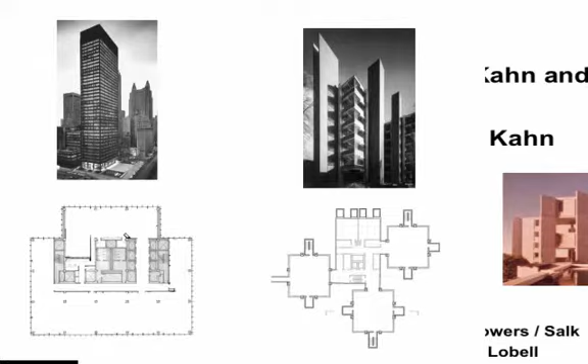So again, here's the building. Does anybody tell me what this is? That's a column. This is stairs, this is ducts - so stairs and ducts, you'd have to know the trick to know which is which. But this is structure, this is mechanical, and he wants to distinguish between them.

So let's start the way we should in architecture with pinning down where our building is located. This is Central City, Philadelphia - Broad Street, Market Street, Penn's 5 Squares, Delaware River, Schuylkill River. So here's that Schuylkill River. University of Pennsylvania is right here in West Philadelphia, so here we are.

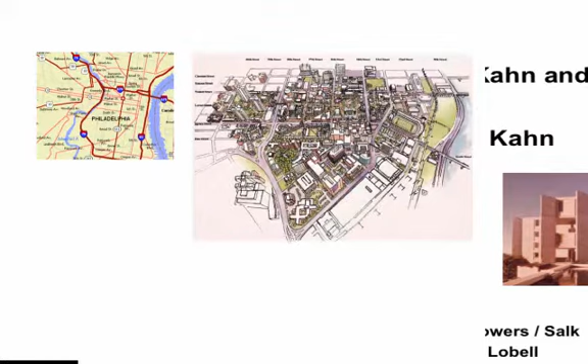Here's an old dormitory. Here is Penn Hospital, the medical school, the biology building, and then here is this laboratory between the medical school and the biology building. This is a walkway between the dorm and these medical buildings. So now we have a sense of context of where it's located.

So here's the pathway between the dorm and medical towers. Here we are in the quad of the dorm, seeing the brick of Kahn's building sticking up and responding to the brick of the dorm. There's a rule at the University of Pennsylvania - all buildings have to have brick.

None of the brick here is structural, it's all veneer, except for these exterior walls here. But this is poured in place concrete with a brick veneer on it, but that's what you had to do. And Kahn's going to respond to this - he didn't like the way that turned out. He's going to respond to it later.

Typical floor, ground floor. Typical floors 2 through 7 are all the same, very similar. On the ground floor, he knocks out one of the pavilions. There's a glass wall around here, but no wall around it at the bottom, and that becomes the entrance. Stairs up and then the doors right here. Same thing over here - he's left out the walls and this becomes an entrance pavilion.

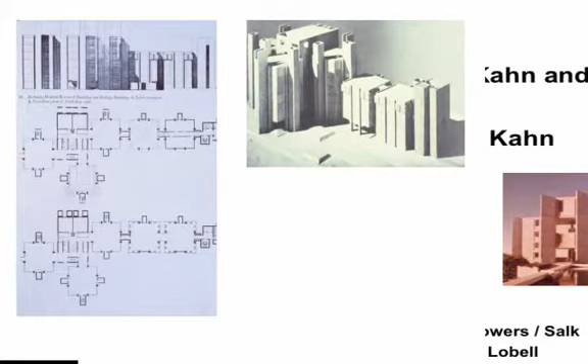I should have gotten a typical floor, but here's a plan of a ground floor. Let's pretend it's a typical floor and see what we have here. We see all this articulation - things, he's telling us this is this, this is this. Let's see what all this is and why it's arranged this way.

And Kahn begins - now we're going to get theoretical, and we'll spend some time on theory. Kahn begins with, what is science? Kahn begins every building with the question, what does this building want to be?

So let's say we're doing a school, and it's almost a cliche - well, school should be a place where it's good to learn. Okay, but now, what is learning?

I'm on a jury, and I'm looking at your school. Is your position that the job of school is to prepare people to become part of their society? Or is the job of the school to enable each individual to identify their own individual sense of who they are and manifest that? Two different theories. I'm not going to say which one is right, but if I'm on your jury, I want to know what your attitude toward education is. That's going to help me understand your school.

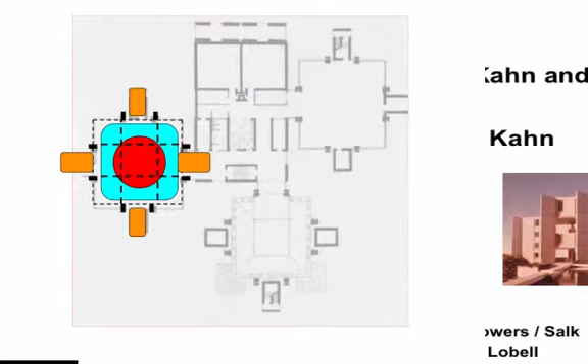Totally through a series of logical steps, not by arbitrarily just putting bumps on the building. Now we've got a couple more things. We need our first means of egress, passenger elevator, freight elevator, toilets, storage rooms, intake, vertical ducts.

Before that, we got three of these. Okay, but they all need to share this stuff. So now we've got these three guys clustered around this. Kahn calls this servant spaces, and these are servant spaces, and these are served spaces. So the served spaces are the main functional spaces of the building. The servant spaces are corridors, stairs, elevators, etc.

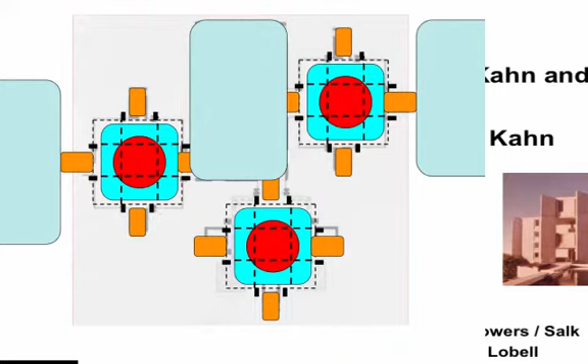Now, we've got to hook up to the biology building that he does next, and hook up to the biology lab that he does next, and hook up to the medical school. So now, here's the whole thing. We've arrived at this through these logical steps.

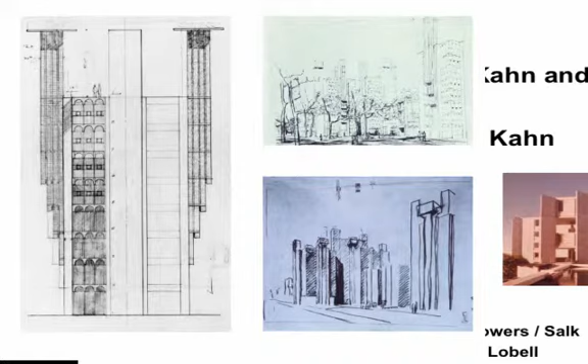As an interesting backdrop, Kahn explored various ideas before arriving at the final form of the building. He had these structures in an arch form, and said, if this lab's exhaust air has to carry for 3 or 4 floors, it's got to be more. This has to carry exhaust air for all 7 floors, so it's got to be even more, and it would get thicker as it went up. He said it's just too much. For a while he said, let's have big exhaust fans on top, with big hoods like you see in industrial buildings. He ended up not doing that. Here's a drawing with this thing stepped out. So there are many earlier versions. If you study this building in detail, you can find the early studies, but it ends up with this. Here's the structure we were looking at.

So here's the structure we were looking at. Now I'm going to throw out some sexy terms: this building is precast, pre-stressed, post-tension. So what does precast mean?

Rather than building forms on the site and pouring the concrete there, you can get higher quality concrete if you pour it in a factory under controlled conditions. You have vibrating beds to make it very dense, stuff like that.

Pre-stressed means what? There are rebars in the concrete. In pre-stressed, which you can't do very well on site, it's done in a factory. You tension the rebars, then pour the concrete. Once it sets, you let go. If you tension the lower rebars, as they come back it's going to bow the concrete up and give it a head start against the downward pressure.

So if you see a parking garage with big spans, those are probably pre-stressed. And finally, post-tension is rebars you put in tension after you put the building together. We'll see that in a minute.

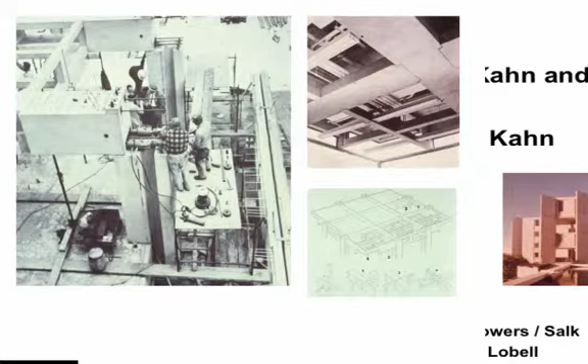Now, here's an entrance. I said he leaves out the glass and brick down here, and this then becomes an entrance pavilion. Now, this is the stairs going in. I'm taking this, well, I didn't take the picture. This picture is taken from the other side, and the reason for that is just the lighting is better so you can see this. So imagine these stairs are here. Every time you go into the building, you come up these stairs and you look up, and the whole story that I just told you, you see.

So Kahn liked to say, the man is a record of the making of the man. The building is a record of the making of the building. So this building is telling us how it's put together, the story I just told you. Now, obviously, a lot of people who are not architects are not going to comprehend all this. But Kahn feels that on a subconscious level, it'll be clear to you what's going on. And this is what architecture should do. It should have a clarity.

And when we talk about Kahn's philosophy, there's a reason for this. In other words, it is communicating a deep principle about who and what we are, an architect's role in that. Now, while we're at it, you'll notice when we look here, this is a Vierendeel. It's not a solid beam, but a Vierendeel. You can tell me what a Vierendeel is.

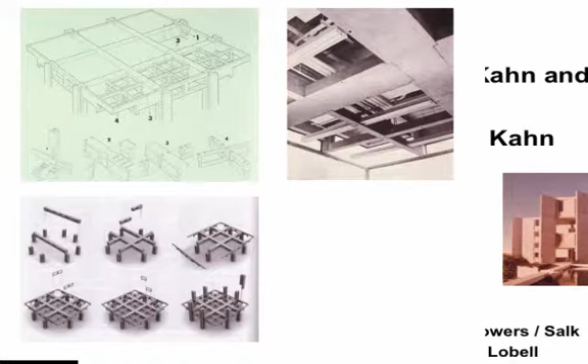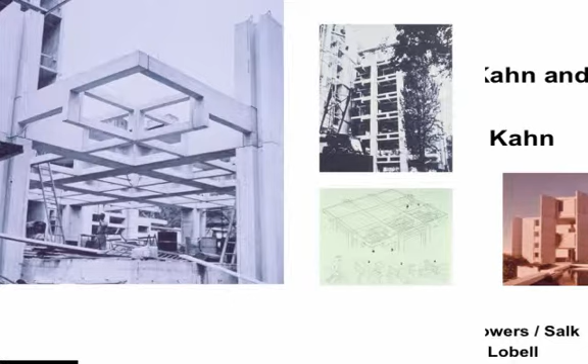So we can see that space where the mechanical runs. See all these holes here, here, here. All the pipes and ducts can run through there. So we see these holes here. Pipes and ducts can run through there. There aren't any in the entrance, but there are up there.

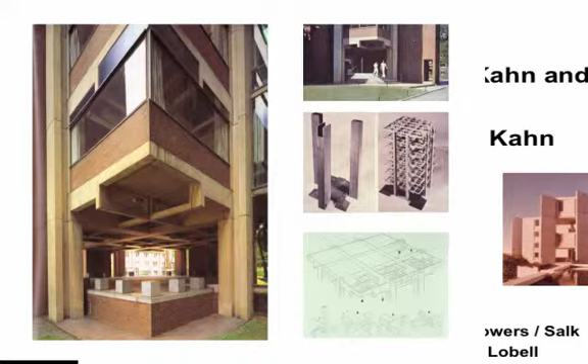Mechanical is important in any building. In a laboratory, mechanical is heating, ventilating, air conditioning, plumbing. It's the air ducts, the compressors for the air conditioning, the fans for moving the air around, the electrical wires, the plumbing. HVAC or mechanical in a laboratory is half the budget, half the square footage, and half the cubic footage. In other words, it's hugely important.

So we saw Mies in the Seagram building hiding all that in the center. And there are reasons for that. You don't want the mechanical out where the light is, where the windows are. You want the people out there. Put the elevator in the center.

But Kahn is very engaged with this mechanical, and he's thinking, this is half the building. I don't want to hide it. It is as important to express the mechanical as it is to express the structure. And so the building told us how the structure worked. Now it's going to tell us how it breathes.

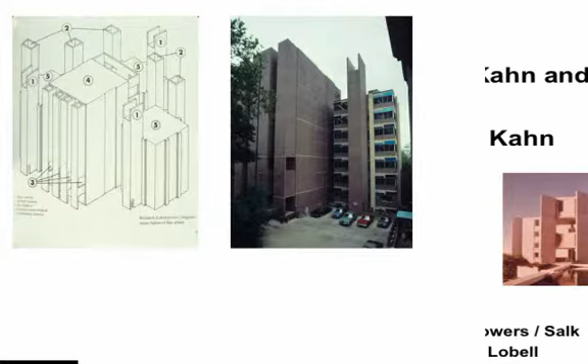So in, up, down, across, and out. The building is a diagram of its breathing. Again, if this is solid, it's air ducts. If it's got these fins, it's stairs. This diagram doesn't show the towers on the back, but air comes up the towers in the back into this big mechanical room, then comes out, goes down here, and into each laboratory, and is then exhausted out and up through here.

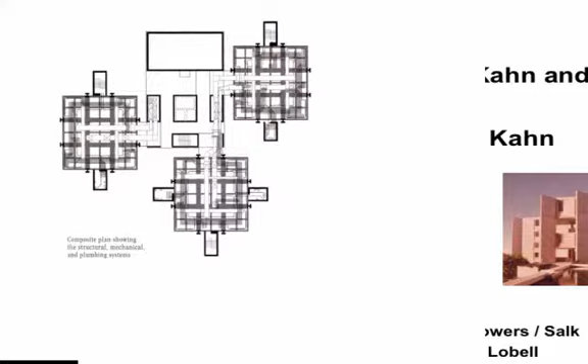So this is a diagram of how the building's made and how it works, and expressive of Kahn's philosophy of science.

Now, I just told you a wonderful story. And this is one of the most important and most respected buildings of the 20th century. Kahn is a very didactic architect. Who could tell me what didactic means? Teaching. So the building is not only supposed to be a good building, it's supposed to explain to us how architecture should be.

Okay, having said all that, there were some problems with this building. And they're very famous, very well studied, very well understood. A major sociologist did a study of it, but we all knew what the problems were very quickly. So the problems are as follows.

First problem is, scientists look at these three pavilions and say, you know what? I've got half my team in here and half my team in here, and I'm running back and forth trying to coordinate things. Why couldn't these three pavilions have just been one continuous space three times as big?

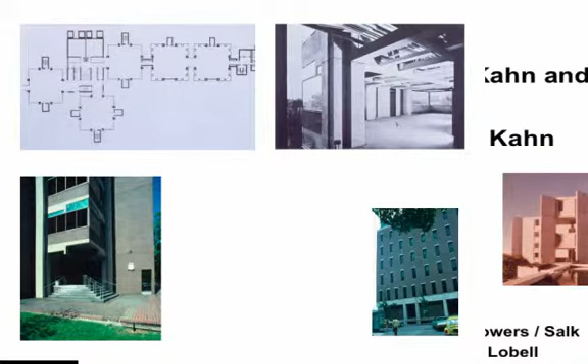So, those are the 3 major criticisms of the medical towers. And we're going to see in Kahn's next building, also a laboratory, the Salk Center, that Kahn addresses those 3 criticisms. So this is Richards Medical Towers.

You get a similar but not deadly virus. You take the original virus, you weaken it, or you kill it. And then you make a vaccine that you inject into children. And the body recognizes, oh my God, that's polio, but it's not going to hurt you. It then mounts a defense of antibodies. Those antibodies remain, so that when the poliovirus does show up, your body deals with it immediately before it causes disease.

So when you're a kid, you get vaccines for measles, mumps, polio, etc. In the 1950s, the March of Dimes, which was the organization dealing with polio—there weren't big government programs in those days—selected a young researcher, Jonas Salk, to develop a vaccine. He did. It was tested in 1954, and it was totally effective. And so immediately, some months later, every kid in the country got vaccinated. And Salk became a cultural hero, a major figure.

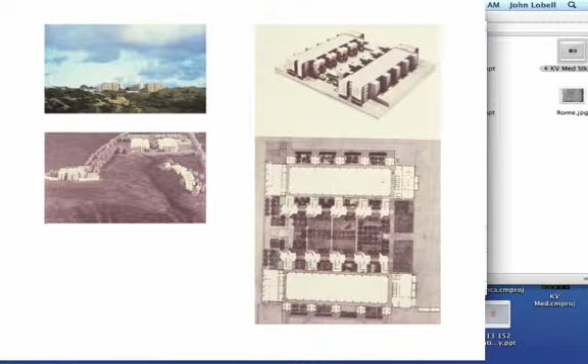Salk had gotten a piece of land just north of San Diego on the cliffs over the Pacific Ocean. We look out from here and we're looking at the Pacific. Originally they envisioned these would be the labs, these would be housing for researchers, a baseball field, tennis courts, and meeting houses for conferences. They envisioned a huge complex but never raised the money for all that, so they got just this one building.

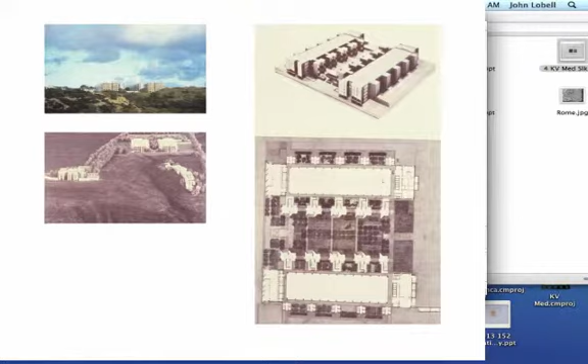In a later version, this is the scientist housing, this is the meeting house and conference center, and this is the laboratory. Only this gets built.

What we have is they decide on two wings for the building facing a courtyard that they share. Let's go to those criticisms I mentioned. The total square footage of the building is the same as medical towers, but there's only a third as many research laboratory areas, so each one is three times as big, exactly what the scientists there were asking for.

One more criticism of medical towers is it talked about how the scientists were going to go to the window on the periphery to work on their notes. Well, the lab space just took over the whole thing. There's no room to take notes. That's not the architect's fault, it's just that you always end up bursting your building at the seams.

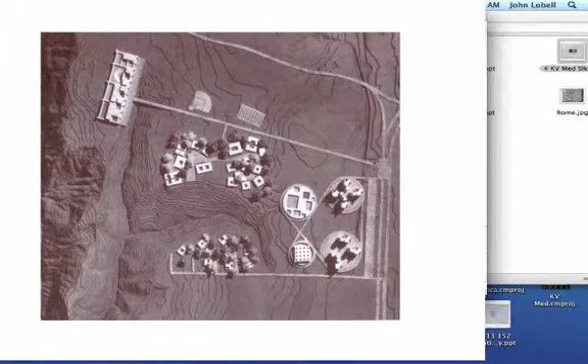How come the drawing had plants in it? Oh, because it's earlier, when they were planning to do that. Yeah. The landscape architect suggested the travertine, correct.

At one point the buildings were going to be half as tall, and there would be two of these, each with its own courtyard, and then they decided to have only one and make it twice as tall. Here's the meeting house, we'll see that in a minute, never got built, and this is the housing, never built.

Now the housing was probably not a good idea. The meeting house would have been great, an incredible conference center. But the housing, it's like you're a young scientist, you have a family, you have kids, you want to be in a suburban community where your kids can go out and bicycle and meet other kids, and you don't want to be like a monk in a monastery.

So here is one of these wings, and what we have is the labs, and then these guys are right here. This is 1, 2, 3, 4 offices. They have views toward the ocean.

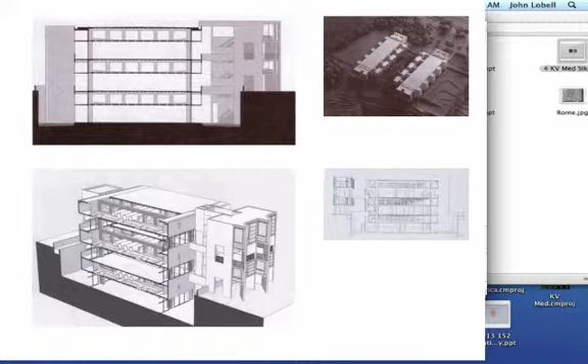So here's the back of the building. This box has stairs, toilets, elevators, and here is lab space, mechanical space, lab space, mechanical space.

And the lab space has floor-to-ceiling glass, and the mechanical space is surfaced with concrete. So, poured in place exposed concrete. And Kahn gives it proportions by where he positions the joints for the formwork.

Now, we can just barely see it, but let's go back here. We see how this walkway is cantilevered out.

So now, our section is taken through these offices, but there's spaces in between. And the sun would come down, but now the sun is blocked from getting into the laboratory by this overhang. So we've solved the problem of the offices getting overrun by the labs. They're in a separate pavilion.

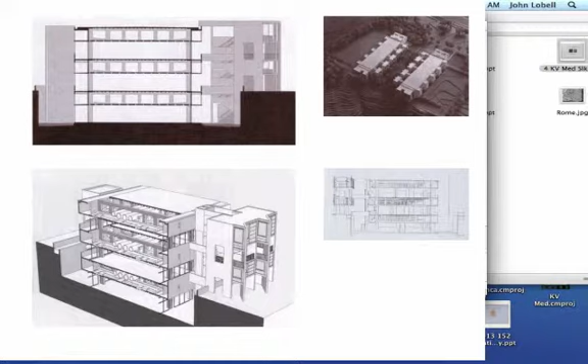So here is a model showing planting in this courtyard, and here is what they did. It's just paved with travertine, which is a form of marble. Then there is a fountain here, and the water runs down these grooves to a big fountain here at the end.

And here's our offices and library and cafeteria looking toward the ocean. So the cliffs go down, and then there's the ocean. And here we're approaching from here and to this courtyard. That approach is no longer there. There's a new additional wing of the building across here, built later.

Now, these are the offices or studies. 1, 2, 3, 4 of them. This is a huge, expensive structure for 4 little offices. But that's architecture. So everything is poured in place exposed concrete.

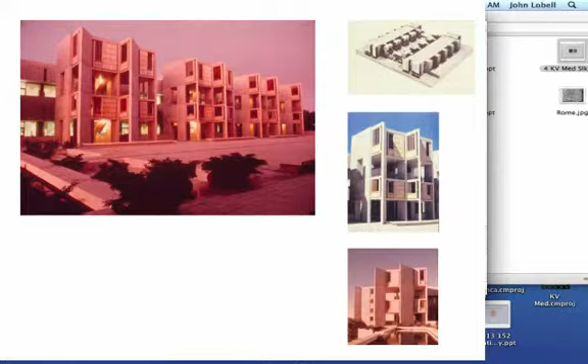So here are 1, 2, 3, 4 offices, and then in here is just an area to hang out. And here we see mechanical floor, lab floor, mechanical floor, lab floor. And we see how this overhang is protecting us from the sun.

And here is lab floor, mechanical floor, etc. Here we see the overhang, so this is protecting the glass from the sun. Glass doesn't mind the sun, but what's behind it doesn't want to be baked by the sun. Floor-to-ceiling glass curtains, just for privacy if you want to shut off your area, you don't need it for the sun.

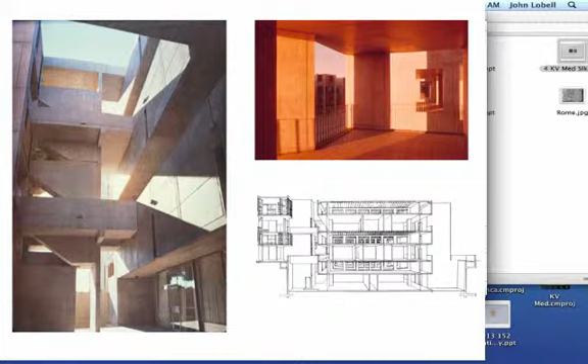And here's this walkway along here, and then we go up half a level to get into our office.

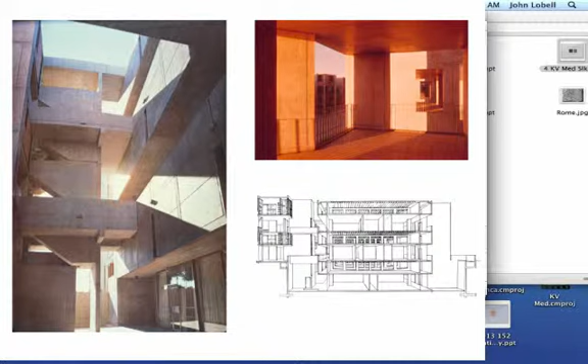So here is a lab floor. You can't get this picture anymore. The thing is totally filled. I was there when one of the floors had not yet been occupied.

So here's our columns, giant Vierendeel above here. Here's our column. Here's the Vierendeel. So Vierendeel is very deep, and we can now run tubes, pipes through here, pipes, ducts, wires. We then have a ceiling, which is also a floor for this area.

So if I need, say, chilled water at my lab desk down here, the engineers can go in here, run the pipes, and then drop them, boom, right down to my desk. They don't, if there was a hung ceiling, they'd have to go in there with ladders, stand on my desk, put a ladder on my desk, go up there to move things around. But they have their own world, totally independent.

They can put anything they want in here. This building, hopefully, will never be out of date, because what goes out of date in a lab is the mechanical systems, which need to be totally new. At some point, if they want to renovate, they just rip out the mechanical and put in all new mechanical. This isn't going to age. Take the furniture out, put in new furniture. This is concrete and glass, that's not going anywhere. You don't even have to repaint it. It's going to last forever.

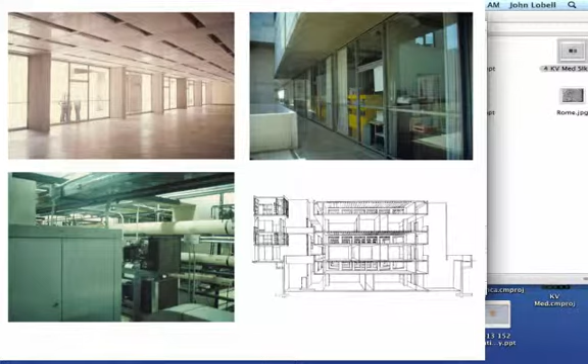Here is the courtyard, with a band of water running down, and very elaborate fountains down there. We'll see in a minute. Here's the water. So we look out to the ocean.

Here are our angled concrete walls pointing the view of the offices in that direction. And here, this is a 4-story blank concrete wall, but Kahn is giving it scale by where he puts the joints for the formwork. Over 300 drawings were made just for how to do the formwork. Usually you'd say to the contractor, just build formwork however you want, because we're going to cover it up with brick or some veneer. No veneer here, this is exposed. So Kahn is very deliberately designing where this formwork goes, and that's what's giving it its scale and proportions.

Now here's the courtyard, here's the walkways. Here are the studies for the scientists, here are the walkways, here's the labs, and here are those bumps on the back that have the stairs, toilets, and elevators.

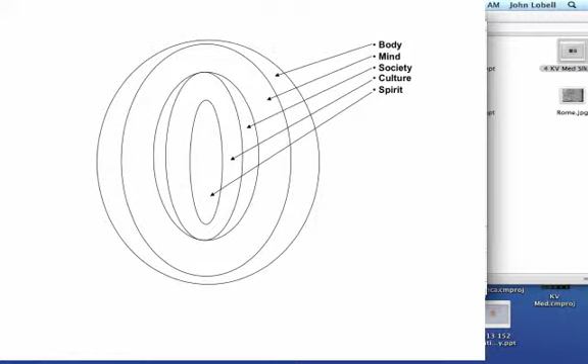Now, something interesting - when we get to theory, we're going to talk about Kahn referring to something he calls form and design. Form is the underlying organization of a building and its meaning system. Design is the particular way you carry it out and the materials you use.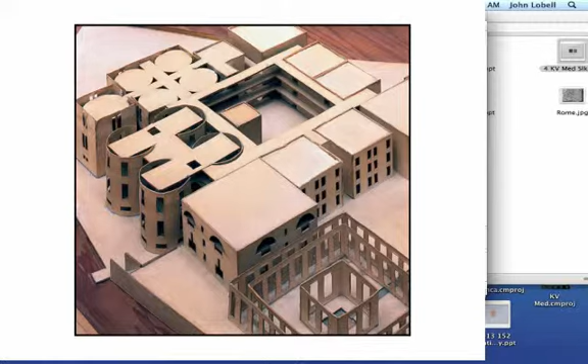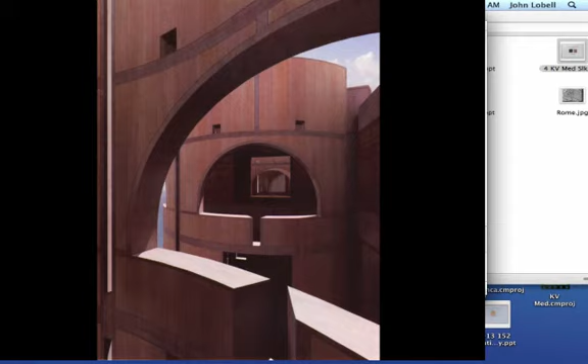And here's a model of it. People have been building models recently, so here's some more models I found online. Here's Kahn's original drawing. Here, somebody did a book of Kahn's unbuilt works on the computer, and I think if you were to redo it today, it would look even more realistic. So here's stuff looking realistic because it's built in the computer.